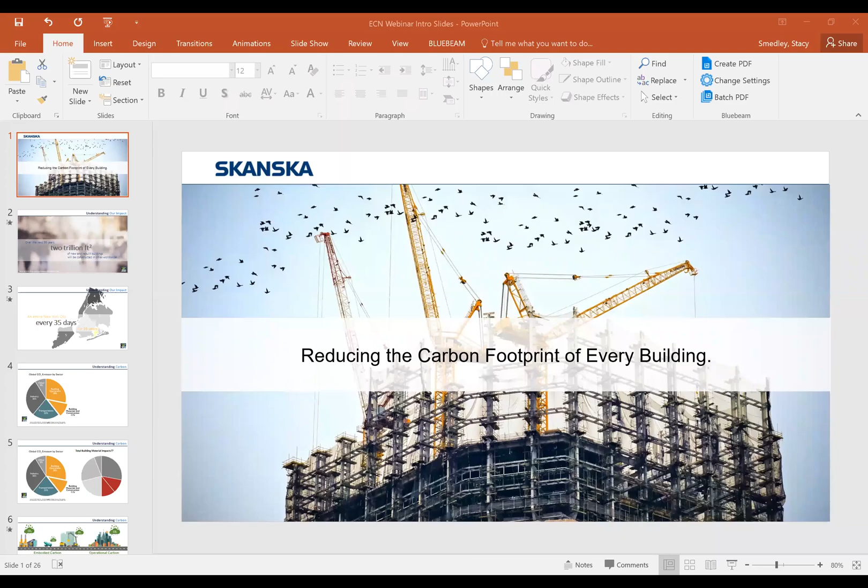Stacy has a Bachelor of Arts in Architecture from the University of Washington and 15 years in the architecture and construction professions. Her resume includes the first LEED for Homes Platinum certified project in Washington State, as well as the first project in the world to be certified under Living Building version 2.0 standard. At Skanska, Stacy leads sustainable initiatives and opportunities and is considered a subject matter expert in LEED and Living Building Challenge certifications, with a passion for reducing materials toxicity and carbon emissions associated with construction.

Stacy is committed to educating and engaging the AEC community on sustainable design and construction, and has served in various advisory and leadership roles, including Chair of the Washington Businesses for Climate Action, Advisory Board Member of the University of Washington Carbon Leadership Forum, Construction Focus Group Chair for the Embodied Carbon Network, Advisory Group Member for AIA Materials Working Group, and Emerging Professional Regional Chair for USGBC. She is an experienced speaker and a 2012 Living Building Challenge hero.

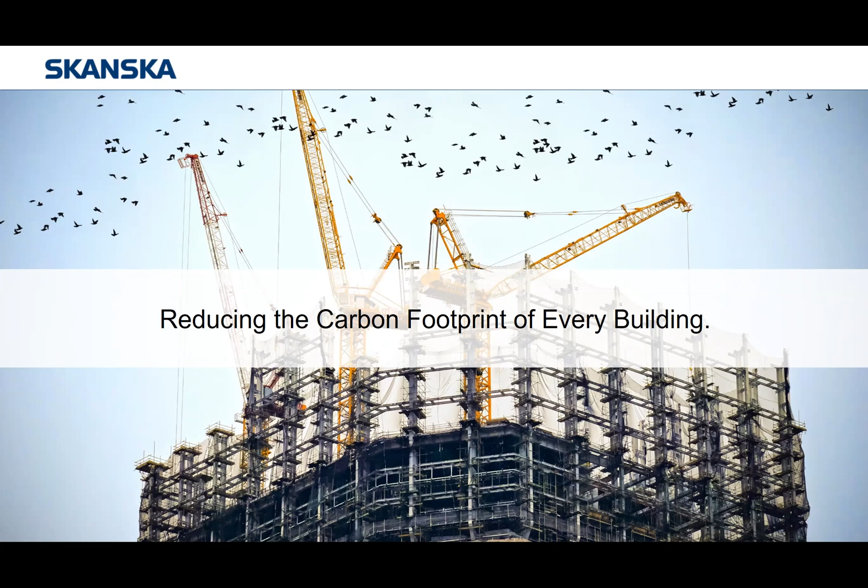There's a series of slides when it comes to embodied carbon that many of us have seen and could say in our sleep, but I always start with them because it's good to hear them over and over again so we don't forget. First is understanding our impact when it comes to construction over the next 35 years. These are slides from Architecture 2030 that tell us that, over the next 35 years, 2 trillion square feet of construction is being built worldwide. To put that into perspective, it's the equivalent of an entire New York City every 35 days for 35 years.

I always like to pause and just think about how many materials that equates to when you think about all the things building the...

Sorry for interrupting, Stacy. I don't know if it's just me, but you're cutting off a little bit. Okay, I will just talk a little slower and see if that helps. Yeah, it was the reception, I think. Now sounds good. Thank you. Okay.

If we visualize an entire New York City and think about all of the materials that have to be manufactured to build that amount of buildings, how those materials have to be transported all over the world to be put in place, and then the equipment we use to actually install those materials on a construction site, it's a daunting amount of emissions associated with all of that work. We need to be understanding those emissions and actively reducing them because we don't have time to wait.

We've all seen these slides, but I always like to talk through them also. The fact is that buildings equate to about 40% of carbon emissions globally, and we've been under the impression that building materials and construction, the embodied carbon component, are around 11%. As we continue to dig into construction-related carbon emissions, we have found overlaps with the transportation and industry categories, meaning this materials and construction component could actually be a lot more than that.

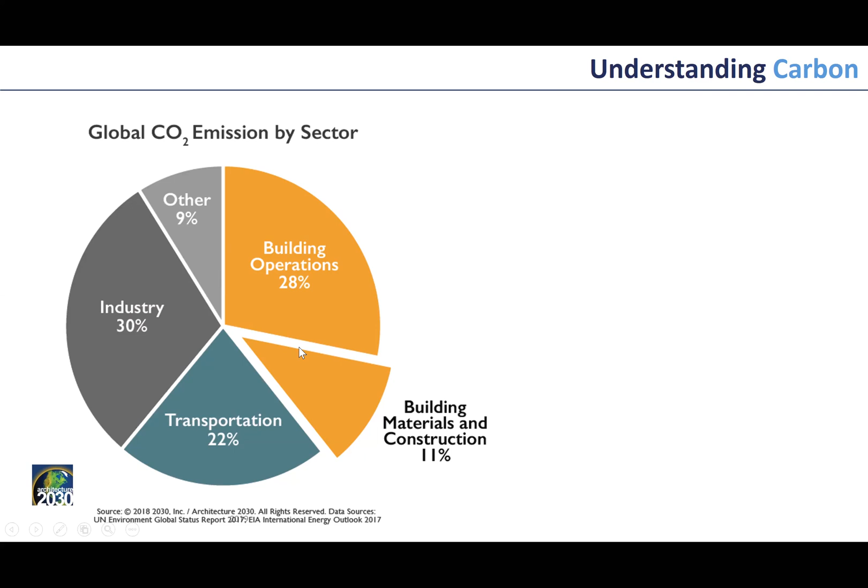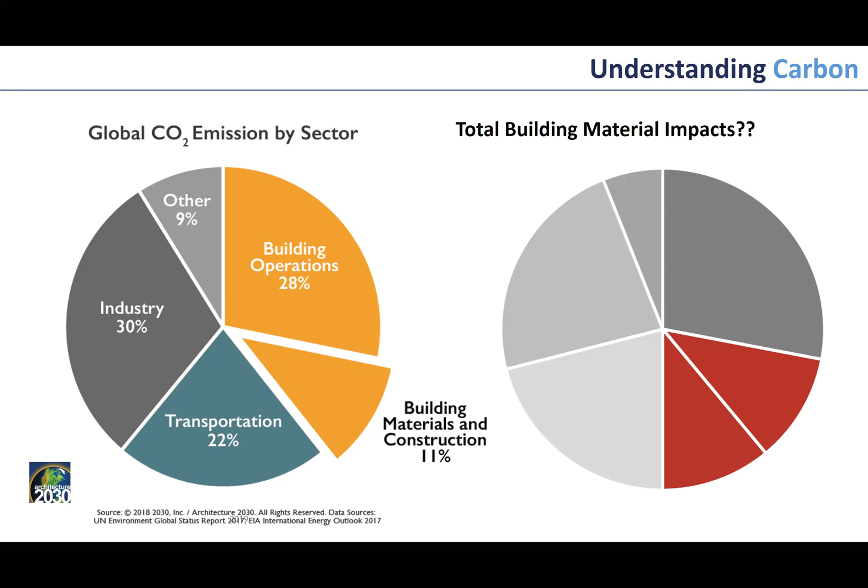What we're finding by digging into this more is that this 11% we thought was associated with materials and construction emissions is likely more than that, because it bleeds over into transportation and industry. So we're still quantifying this, and that's part of what we're doing now at Skanska—understanding this better and beginning to accurately account for these emissions in our jobs. So this is my little cartoon graphic when I'm trying to explain embodied carbon to folks.

First, I think we're all well versed in what operational carbon is—the emissions associated with building energy consumption. That's really after a building is constructed and you turn on the light switch, the mechanical systems start to work, and all those things. We've been looking at that for almost 30, 40 years now, and we've become pretty well versed on how to make buildings more efficient and build them with efficient systems for our clients.

This embodied carbon component has really only been on people's radar screens, I think in general, for about the past 10 years, with early adopters trying to figure this out. And really in the past 2 to 3 years, companies have started to understand what this bucket of carbon is and are working to benchmark and reduce it.

So embodied carbon really is the carbon emissions associated with the extraction, the manufacture, the transportation, the installation, the use, and the deconstruction waste stream of materials.

So when you're a contractor and you see images of all those things, those are really all the things that contractors touch when it comes to procuring materials from manufacturers, transporting those materials to site, and installing them. And then for jobs we're starting, potentially tearing down a building and getting rid of those materials—hopefully recycling them into new things.

So when Skanska started looking at this, we realized these were all things we could potentially inform our clients about and influence from a procurement and installation perspective.

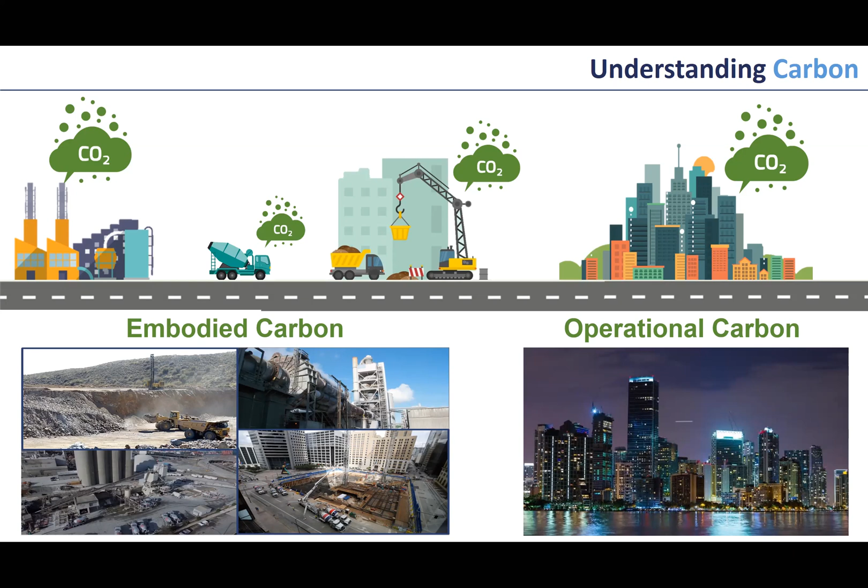This is a slide from the World Green Building Council's report on embodied carbon, bringing embodied carbon up front. This gets into the nuances of the stages of embodied carbon and how they're broken down and defined. What you're seeing here first is upfront carbon—that's really where all of the embodied material carbon and construction carbon we're talking about today lives, in this stage A.

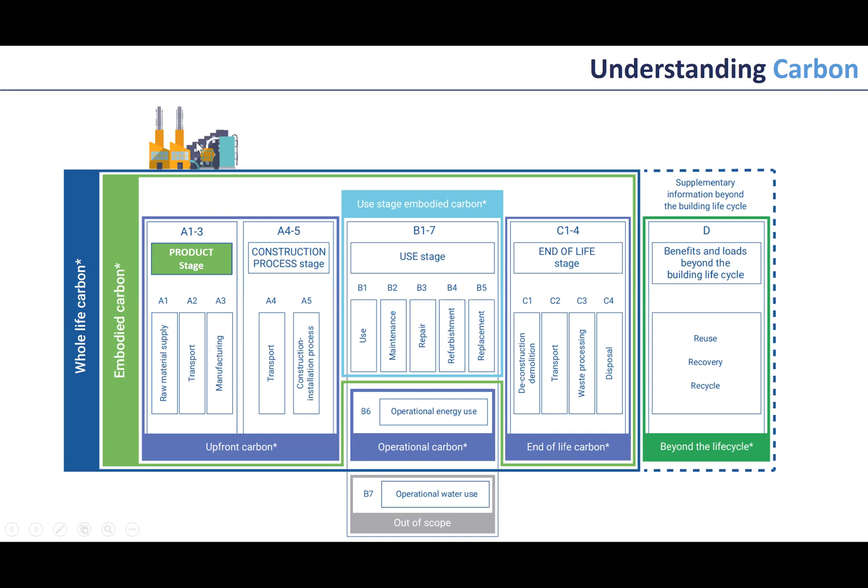There's the product stage, which is really the manufacture of the material—cradle to gate manufacture. There's the construction process stage, which is transporting that material from the manufacturer to the construction site and installing those materials to make a building.

There's then the use stage, which is really about materials and replacement. So if you have carpet tiles and you install them, you have the emissions associated with that first installation. But if you replace them in 10 years and then 30 years, there's the emissions associated with that replacement. So it's not just a one-time emissions purchase at the beginning of the job—there's ongoing additional emissions associated with those material replacements.

And then stage C is the end of life stage, and that really gets into how we deconstruct and demolish buildings with equipment—whether we're doing it with wrecking balls, like in the little cartoon, or doing it responsibly, where we can reuse materials in their whole form, like a structural beam or a wood beam. If we're not doing that, how do we source-separate and transport materials like demolished gypsum board, so it can actually be put back into the gypsum stream and replace raw materials. So that's really the end of life stage.

And for Skanska, this is really how we look at the buildings we're demolishing at the beginning of a project, to ensure that we're ending that cycle for a building that was constructed 50 years ago.

Beyond that, there are supplementary stages that are kind of beyond the life cycle, as well as things like operational water use, which are really outside the scope of embodied carbon. But that's really the whole picture. The focus of our talk today is stage A, and that's really the crux of the impact from a pie perspective. It can be upwards of 80% of that whole pie, so it really is a place to start.

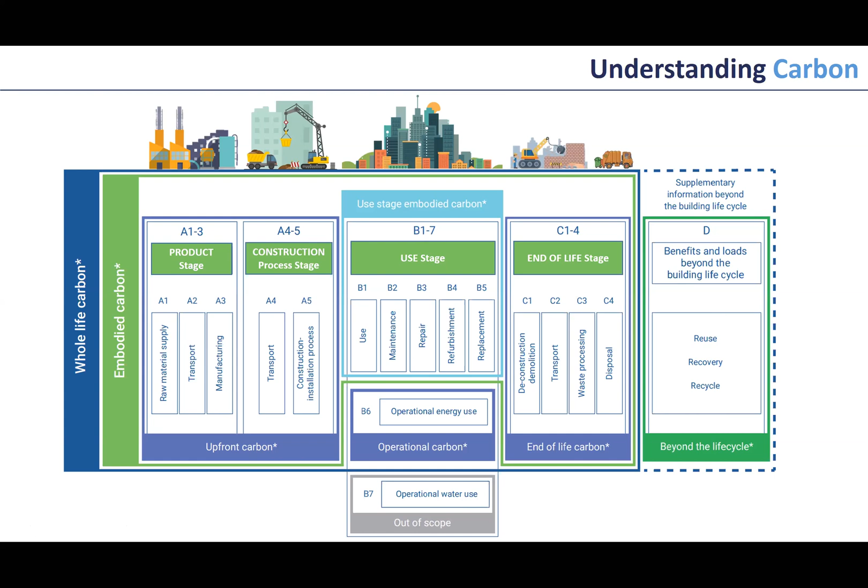Based on research that we've done and folks like Architecture 2030 have completed, we understand that this embodied carbon impact is at least 50% of the global carbon footprint of buildings to 2050. So taking the time value of carbon, which is really zero carbon by 2050, half of our impacts are in this embodied carbon bucket.

We know how to reduce operational carbon to zero through efficient design and renewable energy. We are still figuring out how to quantify embodied carbon and then begin to reduce it. And we need to do this as quickly as possible. We can't take 30 years to do it like we did on the operational side. So how do we do that?

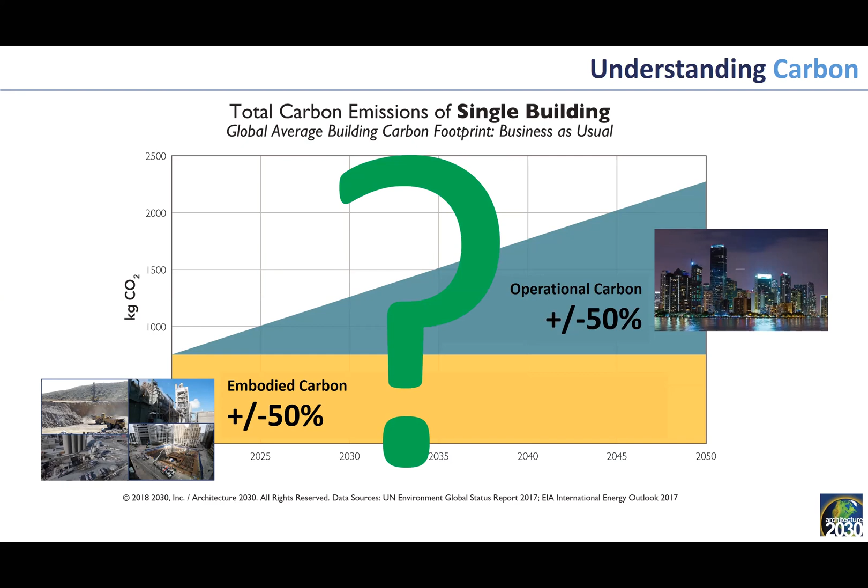Well, the first thing that Skanska did, and I'm going to go through this quickly, but it is important, we have to be able to talk to our clients and understand what the potential impacts are. To do this, a group of us, including Oregon DEQ and the Pankow Foundation and Skanska, funded a research grant that allowed the Carbon Leadership Forum to create a benchmarking database.

You can go to this website at the bottom of the screen, and there's a database of buildings that have done carbon footprint accounting. You can search by type of building and scope of materials. It gives you a box plot that shows, for X number of commercial buildings, some had a kilogram of CO2 all the way up at 995 per square meter, one all the way down at 10. But the crux of the buildings are in this gray area from the 80th percentile down to the 20th.

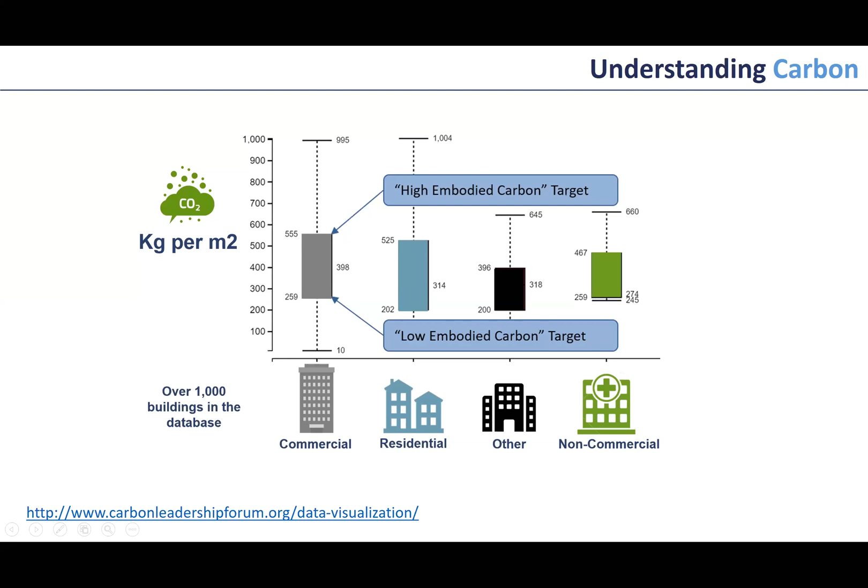So if you take that 555 kilograms of CO2 per square meter number, multiply it by your square meter, you can also do that in square foot, and look at the energy grid and your operational footprint, you're able to take that data and forecast what your embodied carbon footprint and operational carbon footprint might be. This is looking at a project in Seattle where we've done this.

We try to show this to all of our clients during the interview process or early in design so they can understand the relative impacts of their carbon emissions. For a Seattle project, it is largely embodied carbon because our grid is almost entirely hydroelectricity and our code is very efficient when it comes to the required EUI baseline. So if we're talking to a client in Seattle and show them this pie, and they've had a carbon goal on the operational side, this really starts to open their eyes to the fact that there's this whole other bucket of carbon that's actually more of their impact.

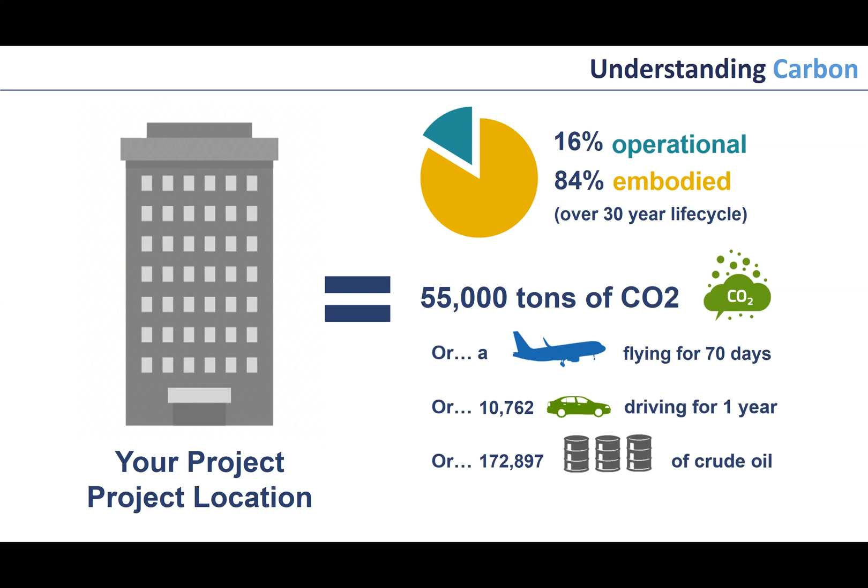We did show this slide to the Microsoft campus when we interviewed for the job, and they have lofty carbon reduction goals on the operational side to get to zero carbon. Because of being able to understand that they had this impact on the embodied carbon side of the equation, they have committed to embodied carbon reductions for their campus modernization project, and they're also going after zero carbon certification through the Living Future Institute.

So I think there is a responsibility from the contractors as we are working with clients and understanding this embodied carbon component more, to really share that information and help inform our clients that there are opportunities for reduction and there is a big impact to tackle.

The next thing that we did was really try to figure out how contractors could interface in the design phase to help influence material choices to reduce carbon per material category. I'm not going to go into the details of all this, but briefly, there are life cycle tools that our design partners use early in design to look at embodied carbon impacts along with other environmental impacts to make really smart system choices.

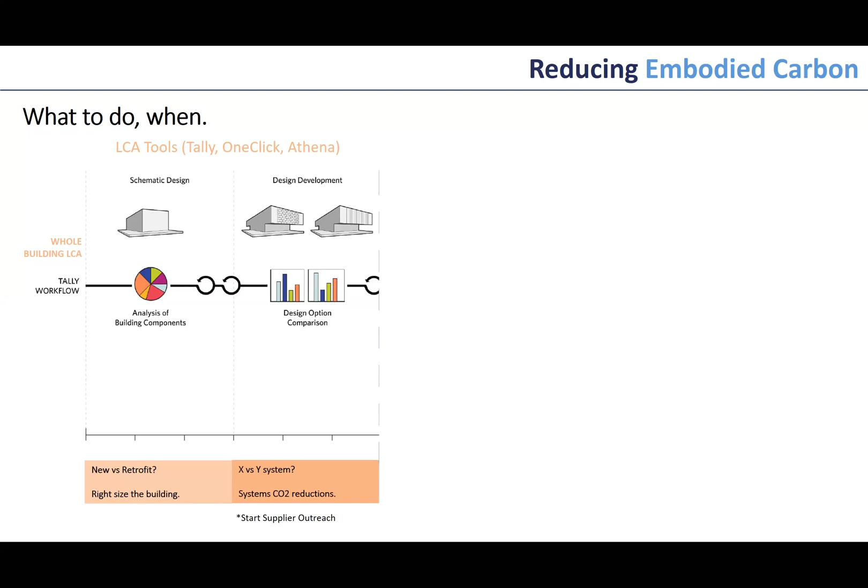But what we couldn't find was a tool that would allow design teams and contractors to begin to specify and procure based on carbon emissions of materials. So how can you look at manufacturers and actually make choices based on emissions? Really, both of these things need to happen. You have to have early design decisions happening based on carbon emissions, and you need to specify and procure based on carbon to some extent. Only then can you really reduce embodied carbon and have it realized.

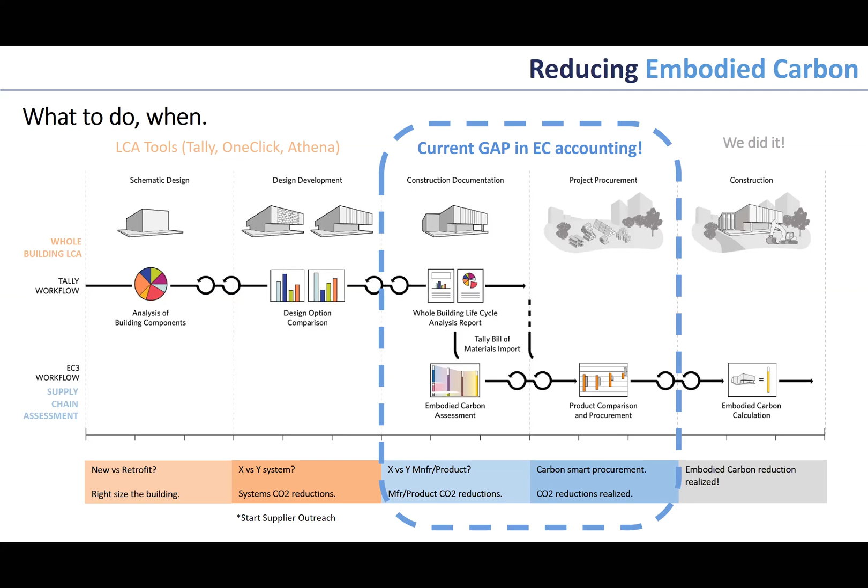Skanska, with the Carbon Leadership Forum and Microsoft, developed a free open source tool looking at supply chain accountability when it comes to carbon. I'm not going to go into the details of EC3 specifically, just an overview since this isn't an EC3 webinar.

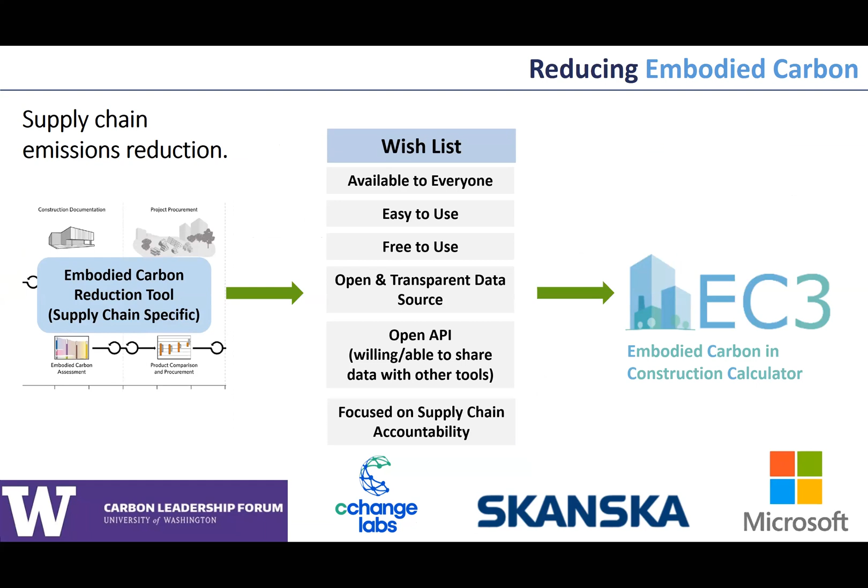It's available to not only contractors, but anyone, to log in for free and look at carbon emissions of materials. It's supported by a lot of folks in industry. From a contractor perspective, a lot of our core clients and partners are looking at this and wanting to fund and understand embodied carbon of materials, and really work together to reduce it. So it's something that's going to be coming more and more from our clients on our jobs.

To do embodied carbon accounting at the material level, it's really similar to cost estimating, where we have material quantities from an estimate and then a cost per unit. In the case of carbon, we have material quantities from an estimate and a kilogram of CO2 per unit that can then give us a building embodied carbon estimate.

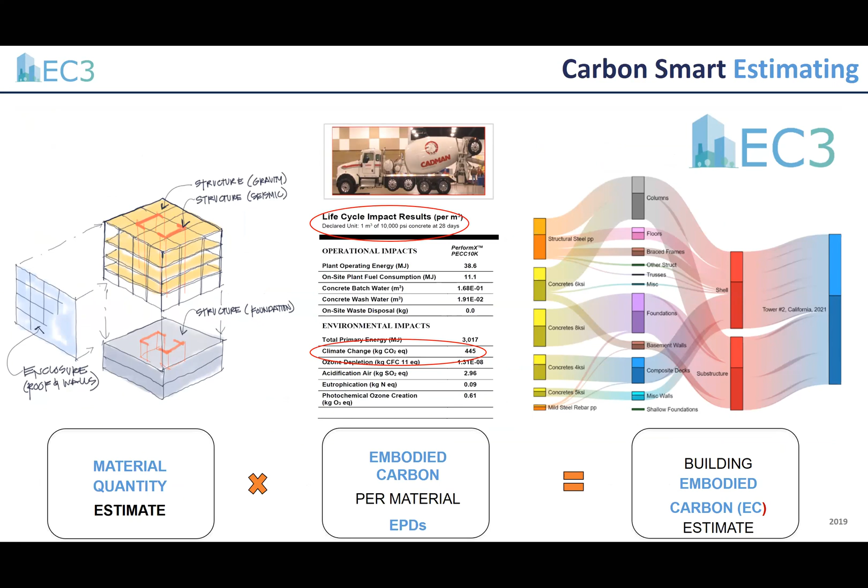The EC3 tool, just to show adoption and why there's a business case for this on the contracting side—it's a tool that's got over 3,000 users as of this month, being used largely by architecture firms, sustainability consultants, and contractors. So there's this impact we need to account for, and there's also the responsibility to be smart on this when it comes to our clients and owners.

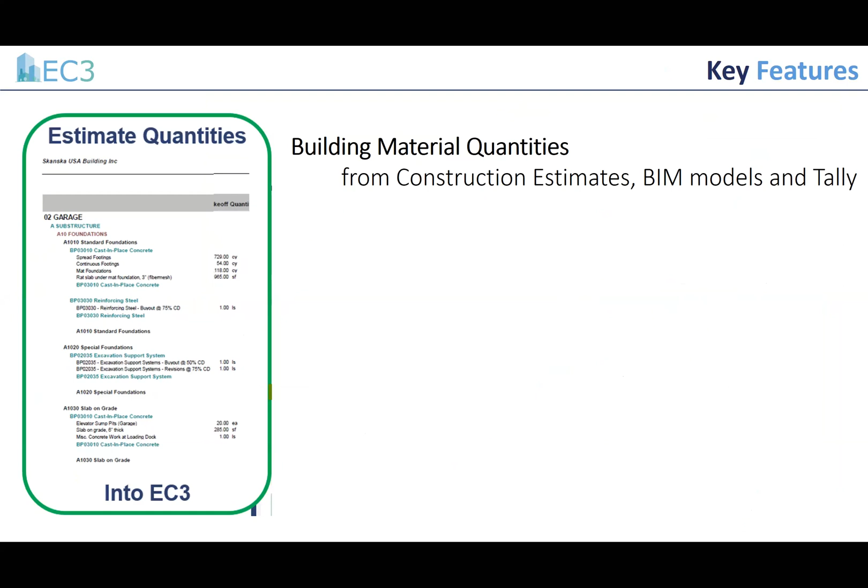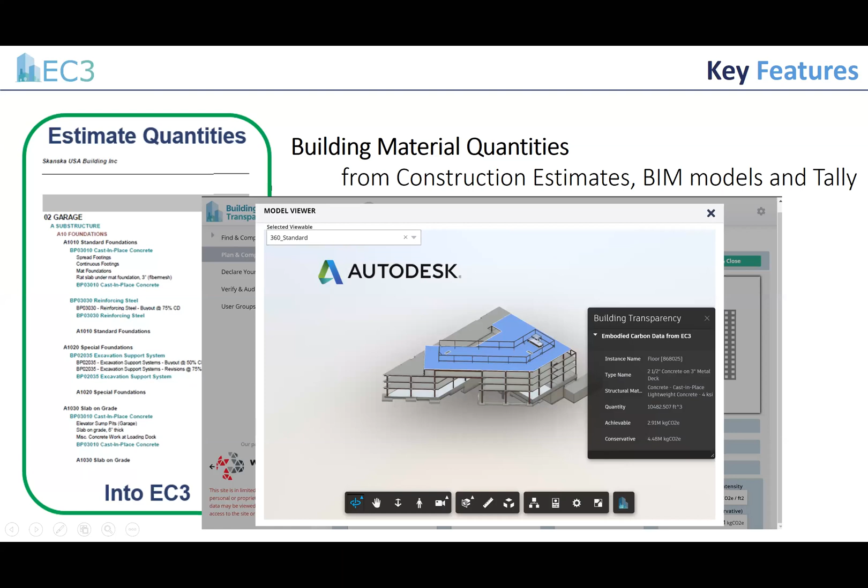Material quantities for contractors typically come from estimates, so there's a way to input information and multiply it by carbon emissions in EC3. There's also a way to import BIM models to get quantities, and a way for our design team members to export their LCA models from software called Tally.

Environmental product declarations are really key to this whole process. They're like nutrition labels for products, where we have a serving size or a declared unit, and a kilogram of CO2 or a total carbohydrate. This is really where we can get into the supply chain accountability—where we can look for manufacturer-specific EPDs, ask our manufacturers to make these things, and start to compare manufacturers based on carbon and cost.

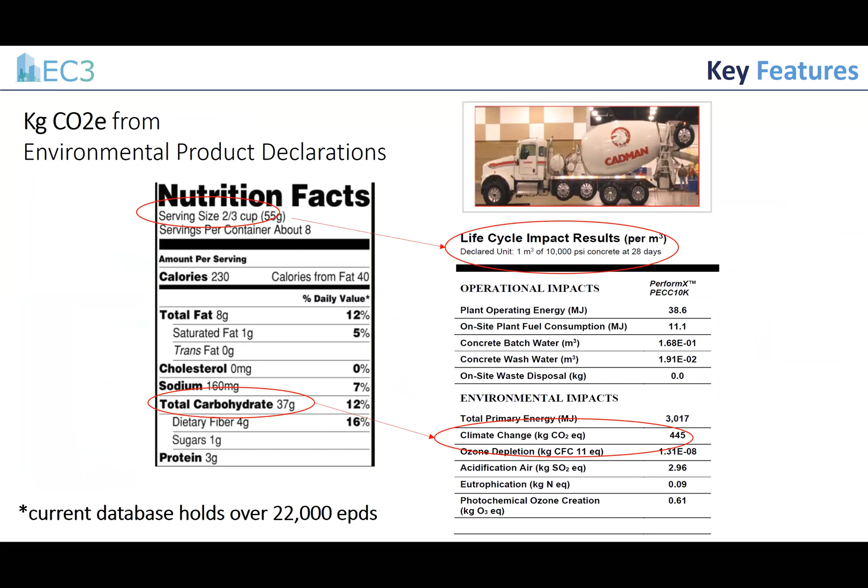The EC3 tool currently has over 22,000 EPDs. A lot of those are concrete, because concrete EPDs are mix specific.

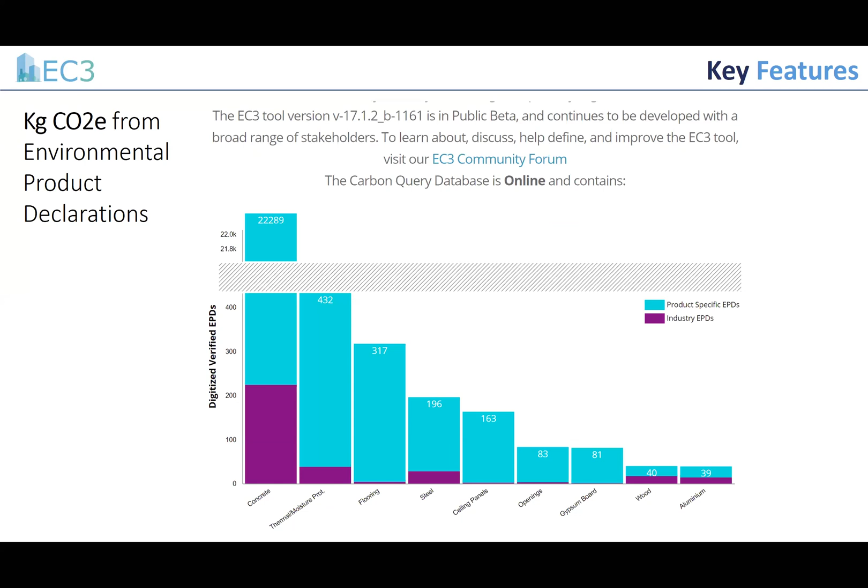The whole idea here is on the embodied carbon stage A1 through A3, which is really the manufacturing carbon—you can use EC3 to go in and assess the market for EPDs. You can start to compare suppliers and manufacturers based on their carbon and their EPD disclosure.

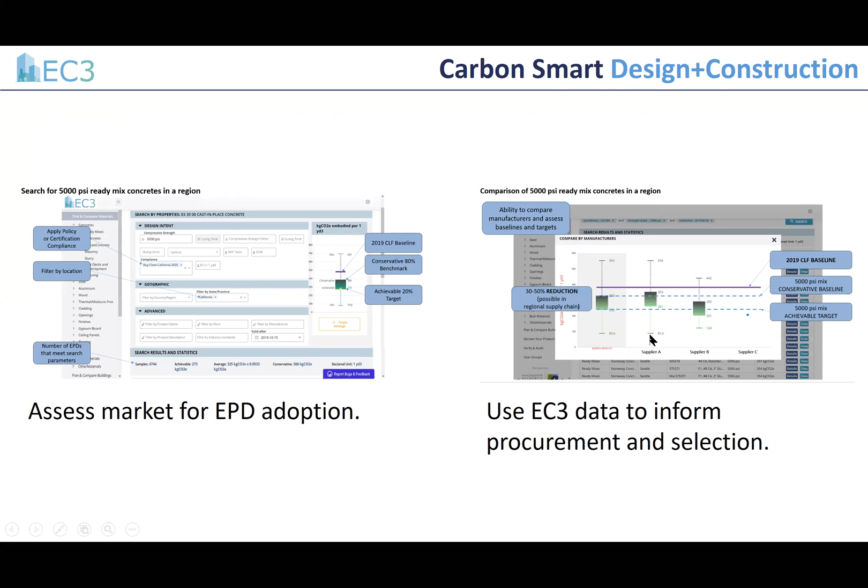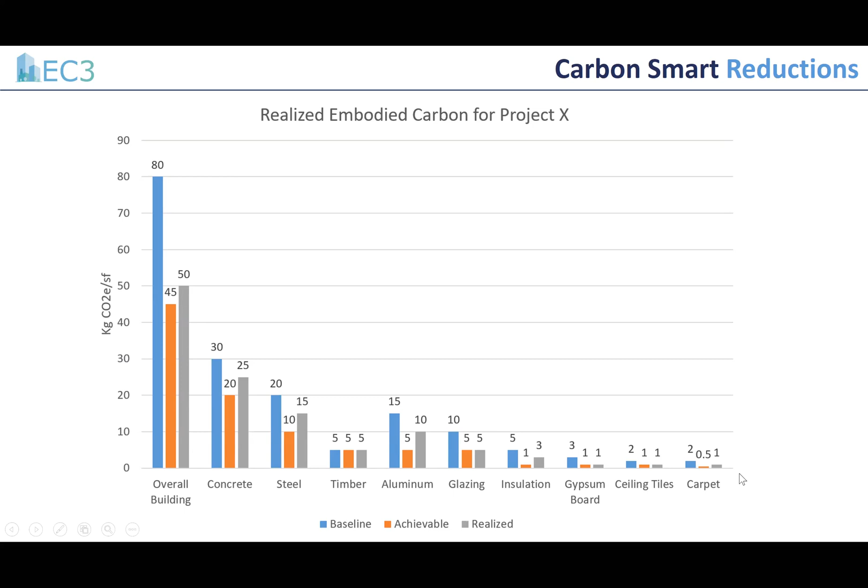At the end of the day, you could do something like this, which is currently being built out in EC3, to show overall building reductions based on the supply chain—what was possible, what you achieved based on environmental product declarations for products—and that can be broken down per material category to really understand where reductions are happening and what's been realized.

At the end of the day, the whole point is to reduce supply chain emissions, and have our role as contractors inform that through working with our suppliers, asking for disclosure on carbon, and helping our owners specify and procure with carbon emissions in mind, just like cost. If we do that, all of the emissions for these materials go down, because suppliers understand they are being assessed on this and actually need to reduce their emissions to compete.

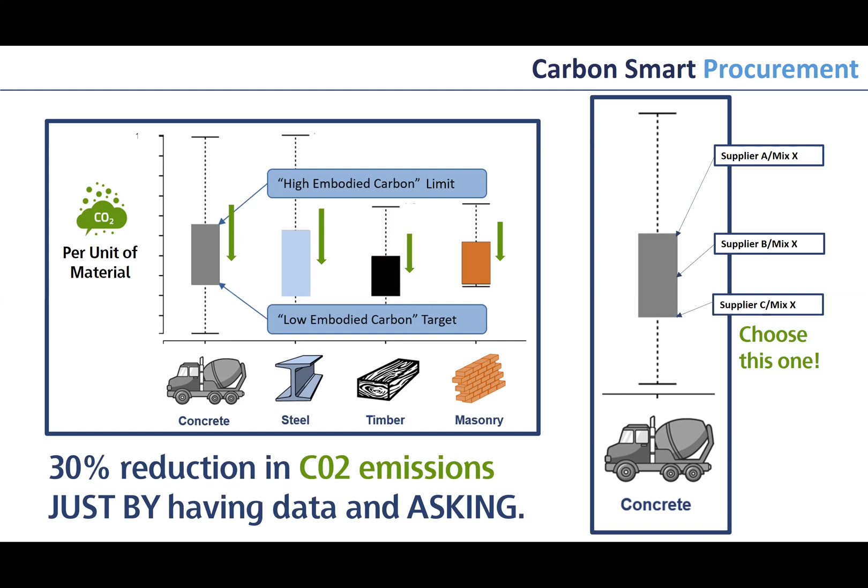And just one little note on the stuff that Mark's going to talk about on the construction site side: there's still a lot of work that needs to happen when it comes to how we account for emissions once products leave their manufacturing facility and get to site. There's a lot of research happening around this, and you'll see how Skanska is approaching tracking it. But really, innovation needs to happen on the construction site side, and we need to be pushing our equipment partners to think about electrifying things and reducing emissions.

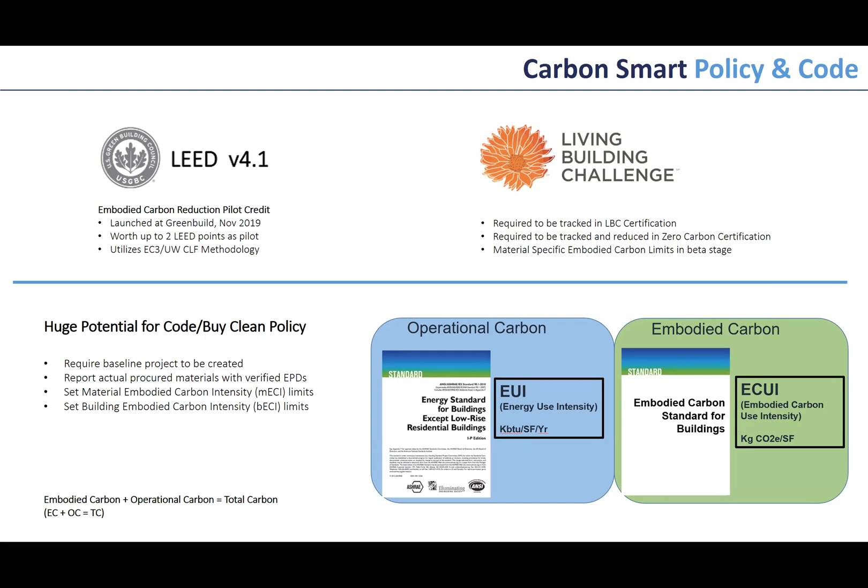The last thing is the fact that there's policy about this. It's not just certain construction companies doing this because we see the potential need for reductions from a climate perspective. There are also clients looking at this from a LEED certification perspective, where there are points for embodied carbon reductions. There's a living building challenge now with zero carbon certification, and clients like Microsoft and Amazon committing to those programs. There's also policy work happening that's looking at embodied carbon just like we look at energy use.

And with that, I'm going to hand it over to Jenelle to really dig into how Webcor has been looking at this from a contractor perspective.

So no pun intended, but this picture responds to this saying: laying the groundwork. I want to start by identifying where we started and where we are today. As Stacy mentioned, the impact of emissions we influence at the time of material procurement are Scope 3 emissions. This includes things like purchased goods and services and materials. These are all upstream cradle-to-gate items, and those are the things I'm going to talk about today. So in order to track this data, I want to walk through our process from inception and where we are.

So Webcor got involved with EC3 and the Carbon Leadership Forum around April of last year, so it's nearly been 12 months. We were asked to support the development of the tool from another GC's perspective. Skanska had been a partner and initiator of the tool from inception, and we wanted to come in as a collaborator, not a competitor, acting as the other GC perspective since our estimating efforts and costs are a little different. So we were able to bring a different lens to the development of the software tool. Between April and November, when the launch began, we dove into the work with the IT team and developers on what we could improve.

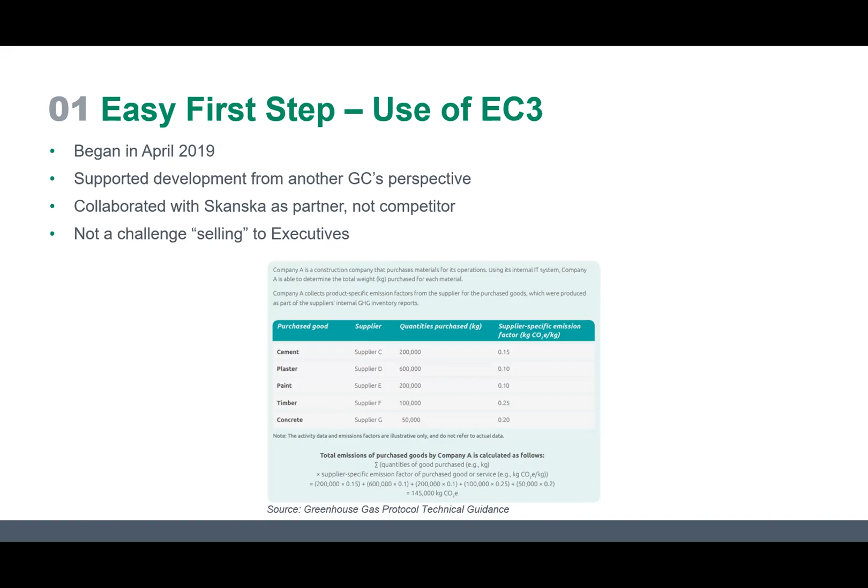Once we mastered the tool - and I don't mean mastering EC3 in absolute terms, there's always things to learn, always new changes daily - we decided we wanted to take it to the next level. There was much more insight EC3 allowed us to gain. So how could we go beyond just data entry and reporting? We started asking internally what new norms we could directly influence as a general contractor, what local jurisdictions were doing that we could build upon - doing business in California is fantastic given how stringent local codes are compared to other states - and how we could push that further. We also asked what needed more focus within our industry. We felt general contractors were typically left out of embodied carbon conversations, and we wanted to embed ourselves more systematically into this process.

So what we ended up coming up with was our carbon commitment, with four items I want to go through. The first part of our commitment is to employ EC3 in all new projects, ultimately with the goal of comparing and reducing embodied carbon emissions from construction materials by making informed material selections. We wanted to make sure we could utilize and continue supporting the tool that we spent months helping develop.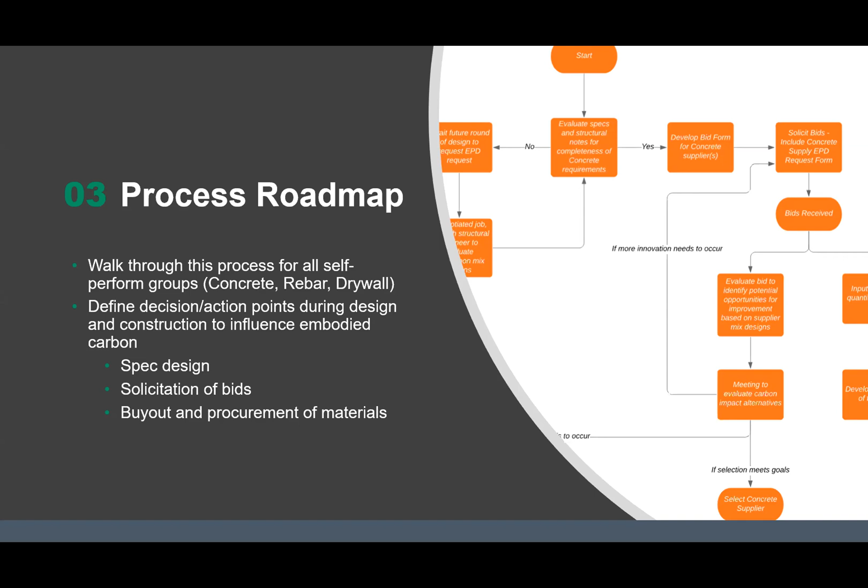Another element within the workflow that needed to be changed was our bid buyout process. So we developed these EPD request forms for the following materials: carpet and ceiling tile, concrete, rebar, drywall, framing insulation, enclosure and glazing, structural steel, metal stairs, and timber. For all those material types, we developed a form very similar to this, an EPD request form.

There's two components of this form that we wanted to address. The first being that we wanted these forms to teach the bidding subs the value and importance of embodied carbon, and really prioritize it as part of our evaluation process with the bids. This ultimately gave more transparency to those who didn't know what the three-letter acronym EPD meant before this point.

I'm sure many of you on this call realize that maybe today's your first time learning about an EPD, maybe you've heard it a million times, but a lot of people that we work with on a day-to-day basis don't know what that means. It's new to them, so we need to start teaching and educating them. We felt like this was a valuable opportunity to do so.

The second component was really to be sure that we collected accurate data that could be easily transcribed into EC3 for final evaluation. If you have inputted quantities into the tool, you're familiar that sometimes collecting this information can be more difficult than it really should be.

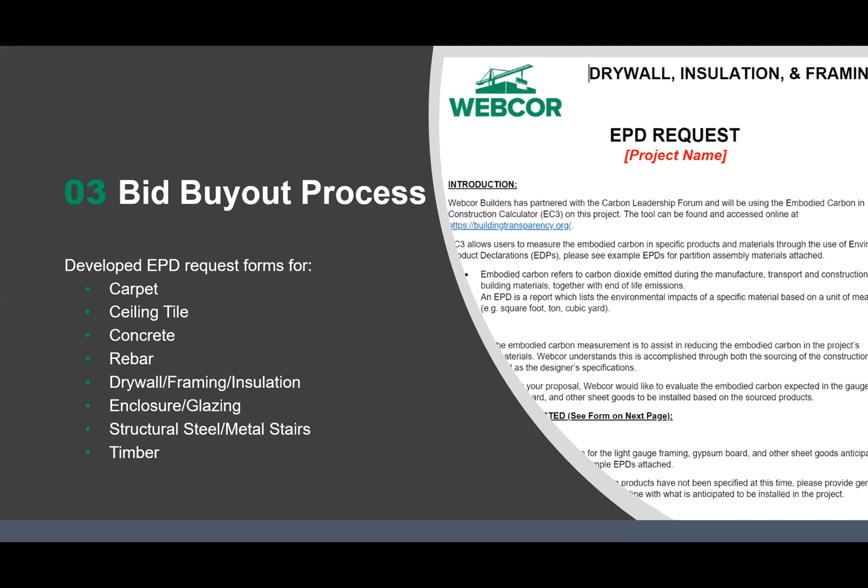It's really important to just find the info from the right resource, and that typically is the challenge. So these forms help us collect the data at point of source, and the transfer of knowledge and data into the tool is much more streamlined in that manner.

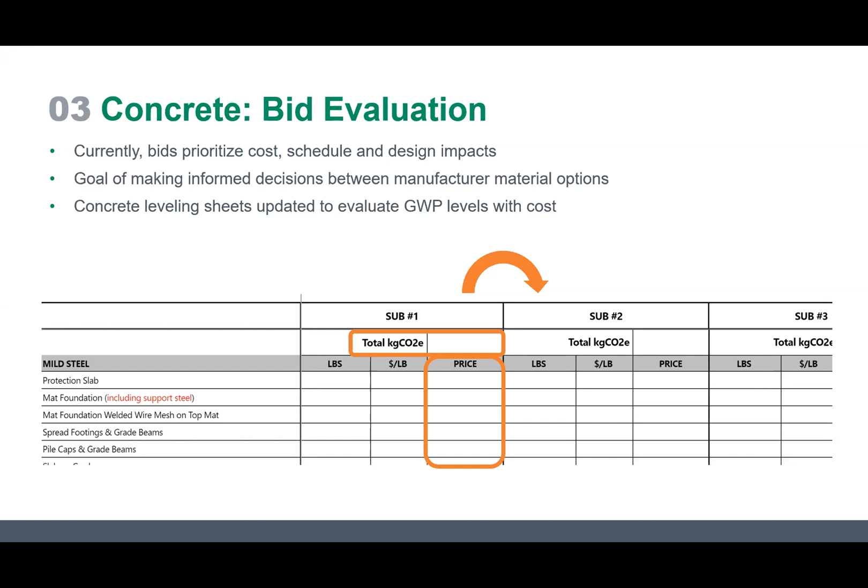The third piece of the current concrete workflow that needed to be changed was the bid evaluation process. Currently, our concrete bids from suppliers are prioritized based on cost, schedule, and design—that's typical in construction. But to make informed decisions and meet our carbon commitment, we needed total GWP information as a factor. So we added total kilogram CO2 equivalents as a data point to collect from each sub and compared that against cost. We updated these leveling sheets to ensure GWP levels were compared sub to sub. Now it's become an evaluation tool and metric for our self-performed concrete teams when reviewing bids, making them more educated about this language and process.

The last part is the drywall group. Our self-performed concrete and drywall team members were key in making this successful, so our workflow for drywall also needed to be changed. But what we discovered through this evaluation and further talks with our team was that it's more difficult to integrate EPDs into their buyout process compared to concrete, mainly because they don't buy out their own materials—they use purchasers, and these individuals are the ones who actually make the decisions. Our team members don't make those decisions, so we had an additional step in the process we needed to figure out.

So we determined as a team that we needed to start influencing certain product manufacturers based on our consumption of that material type. Identifying what products or manufacturers still align with our carbon commitment, yet would not jeopardize traditional design and construction means and methods, was really important. So we started talking and educating manufacturers on things that could help support our use of their products during construction, and ultimately our priorities were the lowest GWP values.

But what we ended up finding out was there's a popular product, USG EcoSmart, and in talking to our team and service providers, this actually was not a favorable product for our laborers. It may be spec'd because the architecture community likes it—it has high recycled content and low GWP—but ultimately this wallboard tends to crumble when cut, in a lot of cases due to the high recycled content, resulting in a lack of productivity and lost material and waste.

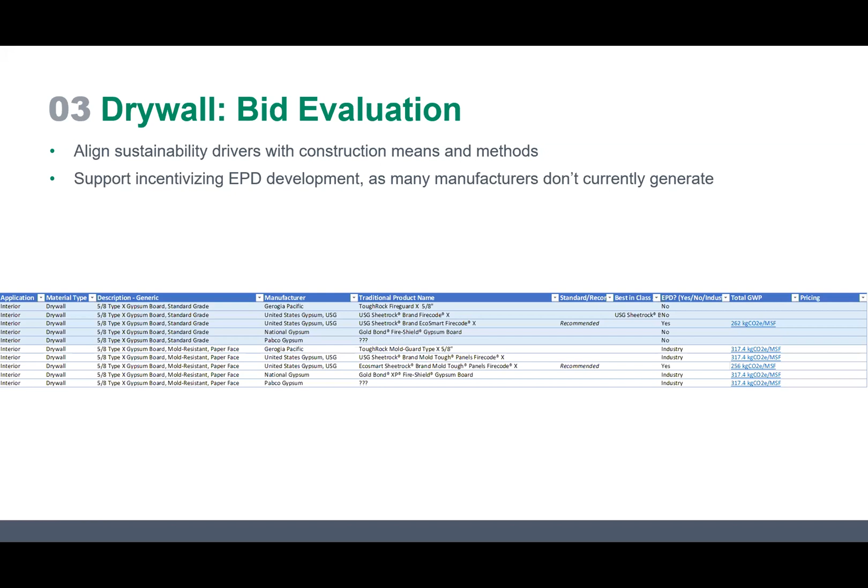Another piece of this, which Stacy touched on a bit, was that we found drywall manufacturers don't actually produce that many EPDs right now. Concrete is the highest performing EPD-producing industry. Drywall is a very, very small percentage of the total EPDs out there. So we're working with these manufacturers, starting to request more frequent production of these EPDs, and hope to change the trend in the future. More to come on that.

Now I want to go into two different unique case studies where we began to implement these items we just discussed, showing how we've been applying this new knowledge and process in our new business operations. The first project here is

960 West 7th Street in Los Angeles—a 56-story, almost 1.4 million square foot mixed-use apartment tower. This project prioritized early coordination with the ready mix supplier, National, as well as the structural engineer team, MKA, and ourselves as GC with our self-perform group, Webcor Concrete. The team's goal early on, and the need for the design, was to increase compressive strength. But to do this most effectively, they evaluated two different mix design options—the first option was a weaker option.

So it was utilizing a local aggregate, and for whatever reason, this aggregate in the local LA market is weaker, and ultimately would require more cement to be added. And as we know, cement has a higher GWP, increasing the total embodied carbon.

So our team needed to coordinate with the suppliers to see what strength opportunities or properties we had to meet based on the design, what we could meet with the local aggregates, and then assess the cost-benefit analysis as to the benefits and cost impact, and how this would align with our structural design.

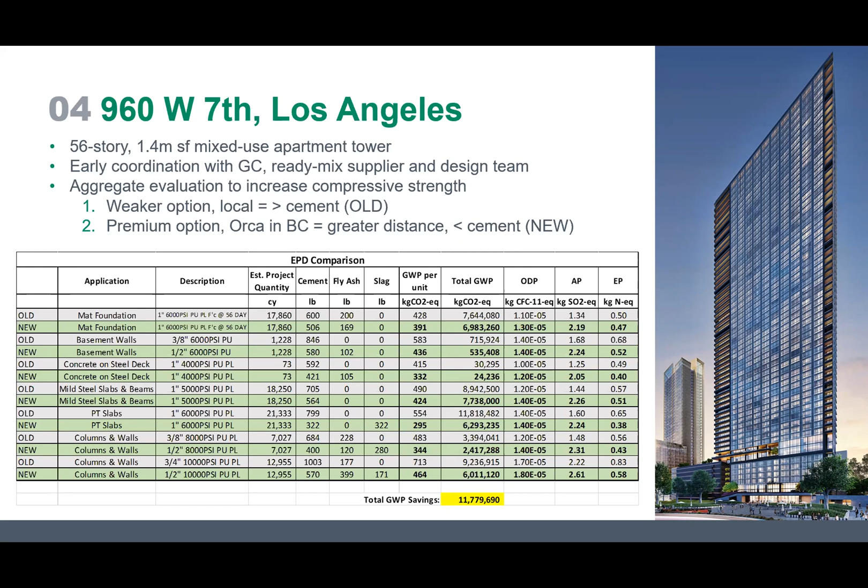And in talking with our Webcor Concrete team, a couple of challenges that I found were cost drivers and decisions due to competition - that was just huge. So cost is always key. The business and the marketplace is really challenging right now. And if there's always ways for us to find open and frequent dialogue and make these discussions a priority, it's really key to do early and often.

So we decided to also embed embodied carbon into the analysis with our estimating team. It wasn't something that they had prioritized as clients, but we wanted to make it part of their discovery. And ultimately, the alternative design option actually ended up saving about almost 13 million kilogram CO2 equivalents, but it wasn't an item that was deemed critical to the client.

And the reason why I'm telling you guys this story is because, as already mentioned, I think it's really important for us to be transparent and communicate the options that clients may have, even if they don't ask about it. And even if ultimately it's not a decision factor that the team decides to make an impact on. So this was not a driver for the client, but it was something that we felt was valuable to show them anyways.

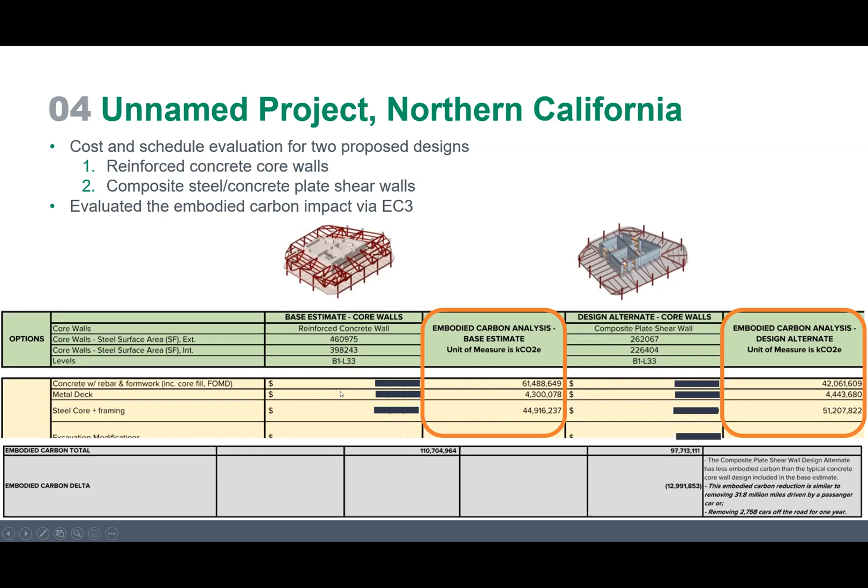And then I think finally, next steps for really all of us is to think about, in the AEC community, how can we improve this process moving forward - test it out on more projects, have a continuous innovation loop of redirecting and changing and editing the process as needed as the marketplace becomes more familiar, really begin to evaluate our Scope 3 emissions over time through our historic data collection, and finally collaborating with other AEC manufacturer leaders. It takes a village to make this happen, and the opportunities really are endless.

And I think I'm excited for everybody on this call to really hear what we have to say today, because I think it takes many people more than just the general contractors to make this successful, and I look forward to the future. So thank you guys very much, appreciate it.

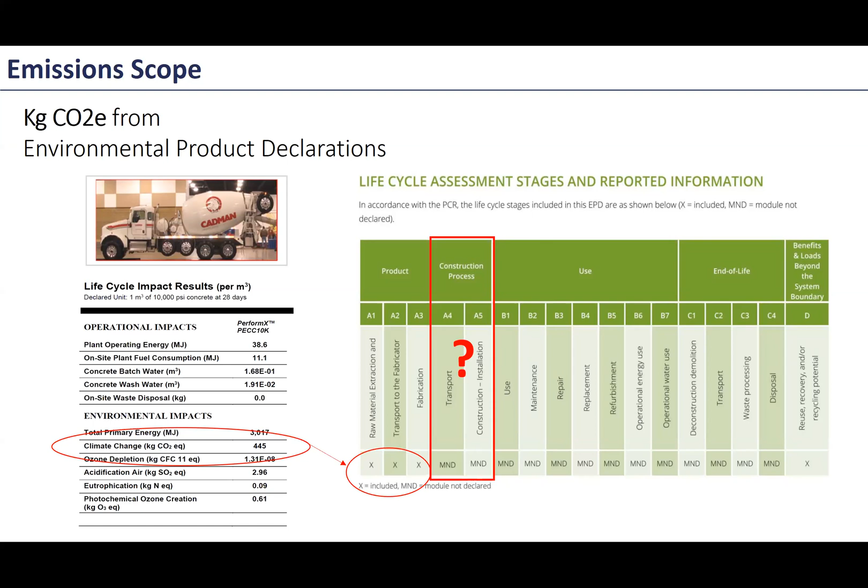Just to lay the groundwork, really boiled down to, for us, tracking 4 different things, and that was material transport to site, waste hauling from site, any off-road equipment and vehicles burning fuel within our project fencing, and then our temporary power usage.

So from that, knowing that we needed to get fuel burn in gallons or vehicle miles traveled and kilowatt hours, we asked ourselves and working with our project team, what are we tracking and what are our trade partners and subcontractors already tracking that we can piggyback off of to make this as time efficient and painless as possible. Because obviously, like we've talked about before, time and cost impacts are always at the forefront of a contractor's mind. And so we were kind of brainstorming how to streamline this whole process.

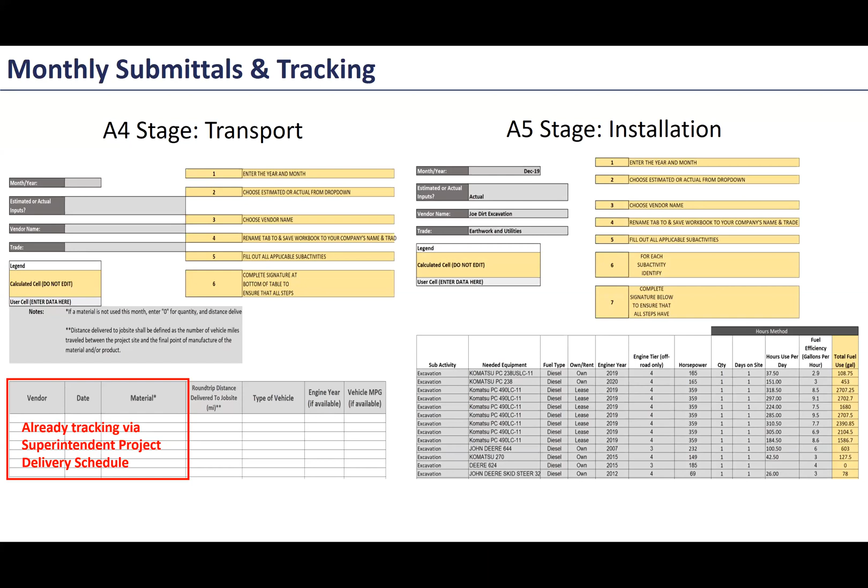And then for installation, that's mainly all of our off-road equipment fuel burn on our project site. It was the same exercise. We asked for a number of different things and data points from our subcontractors and trades. And what we found out is that a lot of this is already being tracked internally by those firms. Usually someone out there has an equipment log or at least a fuel log that gives us access to the data we need. Ultimately, one of our trades pushed back a little and said this is a little too much of a lift to fill out all this data.

So we just simply asked for the fuel invoices that they had been receiving on a monthly basis, which was a pretty simple exercise. And so it's the same concept for waste haul tracking. We get diversion reports on a monthly basis that give us access to where we're hauling all of our waste. And just knowing the vehicle mileage behind that is really all we needed to get a carbon footprint.

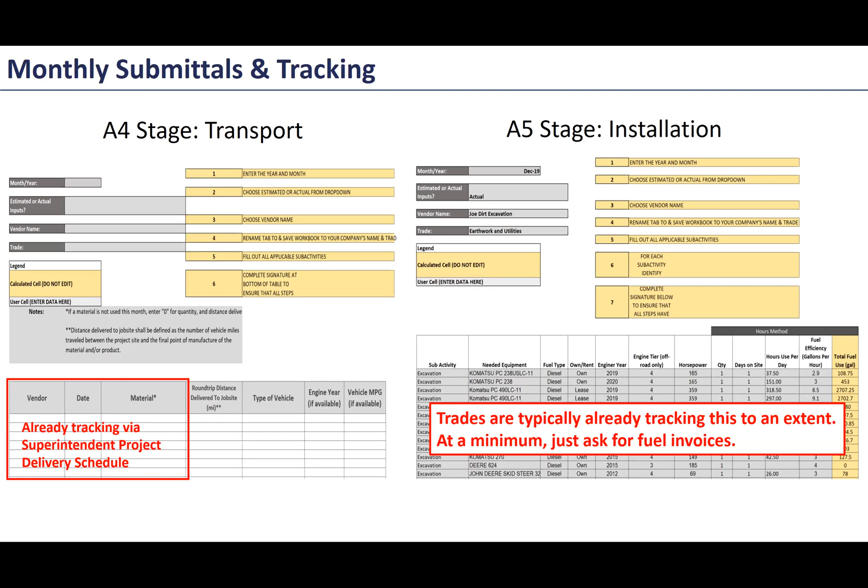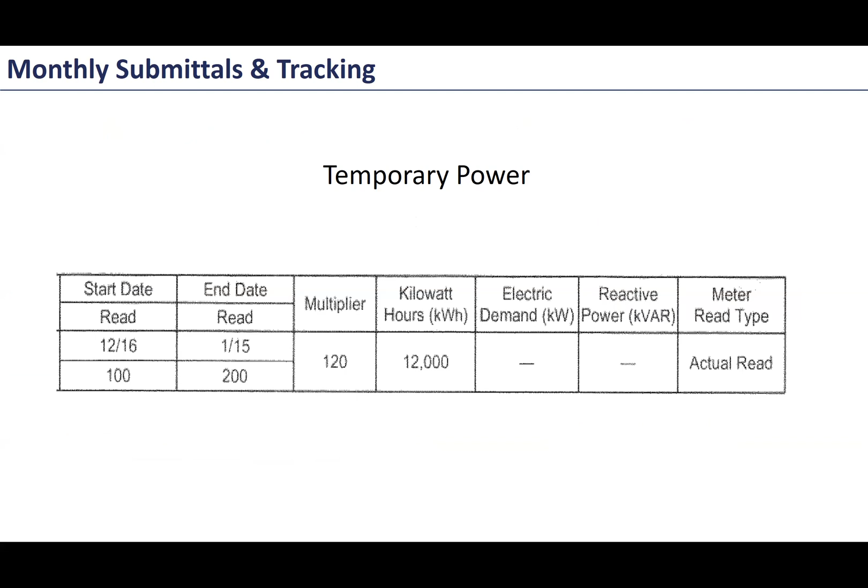Same concept for temporary power. I think it worked out well on this project that we, the general contractor, were paying for our temporary power usage. So this was as simple as me talking to our accounting team and having them show me how to actually go into the system and pull our monthly utility invoices that we're getting billed to the job site. Every utility invoice shows a kilowatt hour usage based on a meter reading for a given period of time.

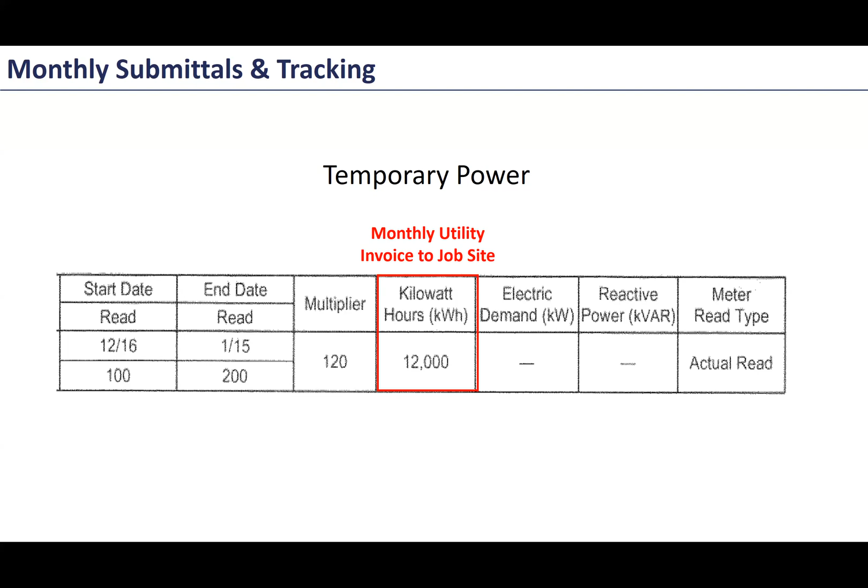And so with that and our utility emissions factor, it was a pretty simple calculation to do. Once we had all of that information, Microsoft Excel being the powerful tool that it is, we were able to automate a spreadsheet that basically spat out all of this information, and that allowed us to digest all of the data that we were getting.

So if we want the best bang for our buck, as far as trying to figure out ways to reduce that number, we're going to target our off-road equipment, maybe not so much on the side of temporary power. It also allows us to break it down by trade and source of where the carbon emissions on our site are coming from in proportion.

And then the other metrics we've been tracking, trying to normalize all this carbon data against some of our actual work in place, if you want to call it that. So for our demolition subcontractor, if we know that they're emitting a certain amount of carbon per month, and if we know that they've been demolishing a certain square footage of building, we can start to look at that as pounds of CO2 per square foot of structural demolition.

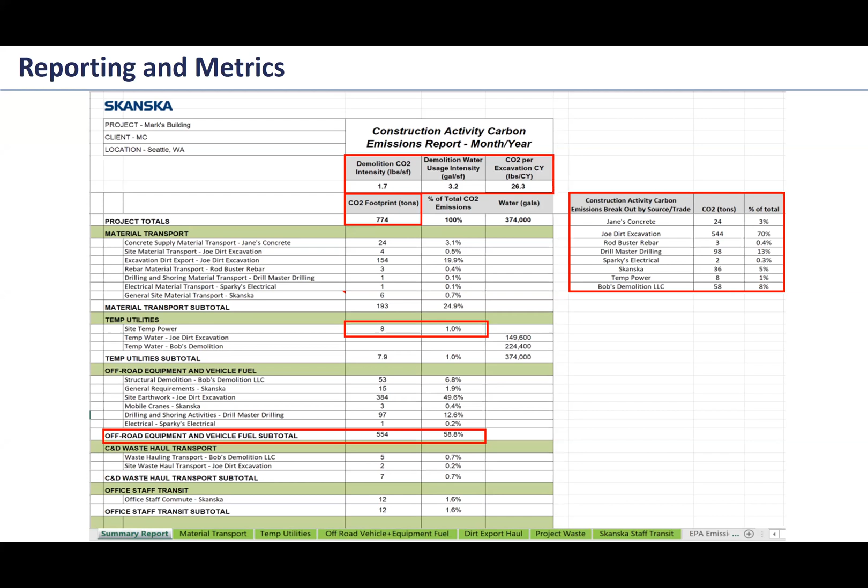So we've been looking at that metric for carbon emitted per cubic yard, or truck cubic yard, of excavation that we've been hauling off site. And the same thing actually for water usage too, which is a whole other conversation, but has been a really interesting data point to track. And so this ultimately rolls up into a project total spreadsheet, and that's kind of how we've been tallying our numbers and accounting for our carbon on site.

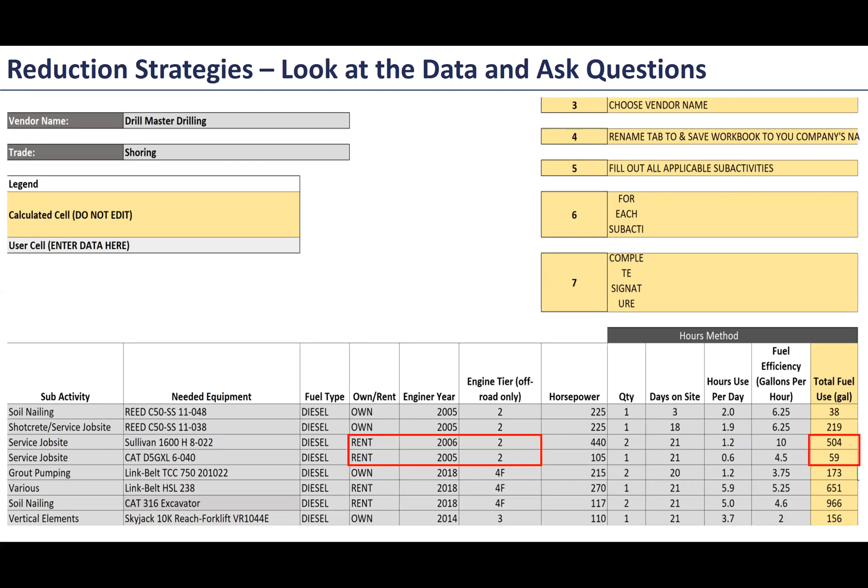There's other reduction strategies we've looked at around reducing fuel burn. Stacy was more involved with this a while back. On one of our projects, we had reinforced concrete buildings being demolished, and instead of trucking that concrete offsite to be crushed into base course and trucked elsewhere for road base, we worked with our demolition subcontractor to get a concrete crusher on site and used the crushed concrete for applications on site as road base for our construction haul roads. Stacy did a lot of calculations on the carbon savings associated with that, and it was a big win for us on the reduction side.

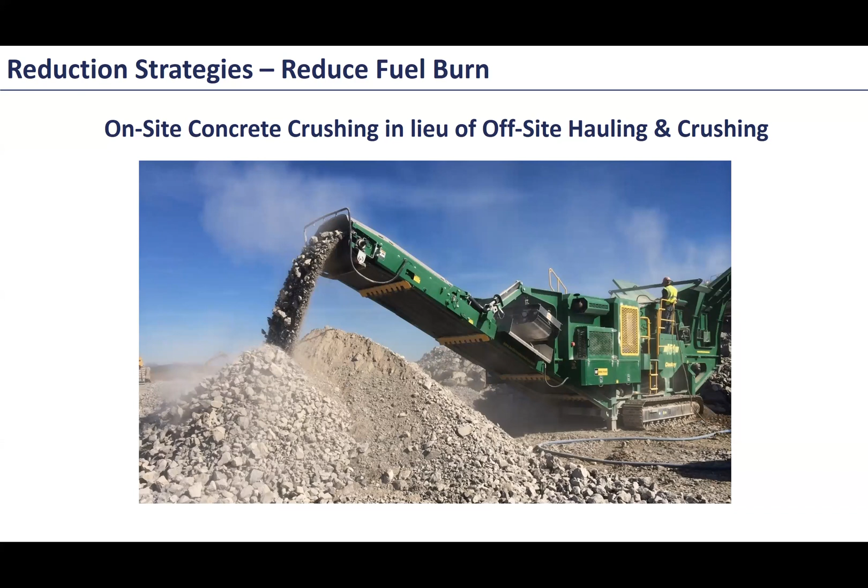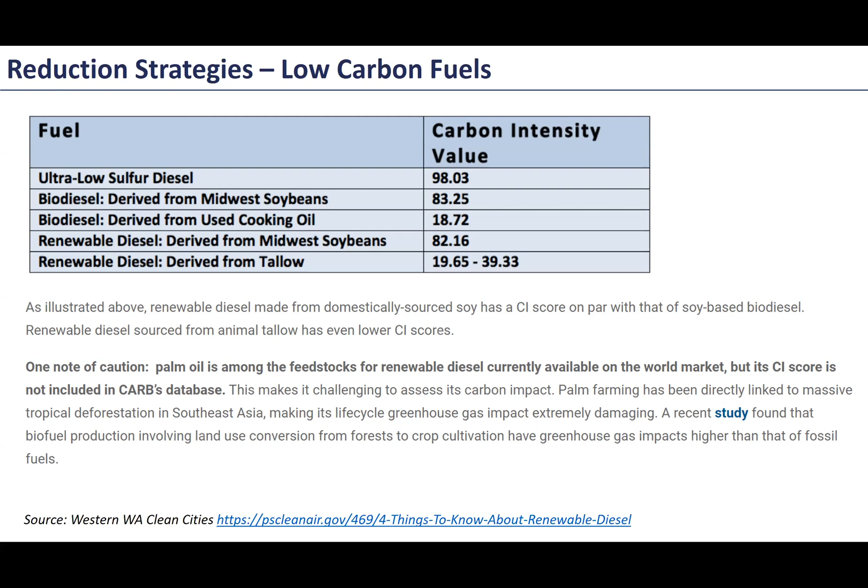There's also a lot of alternative fuels out there. Some of you may be familiar with biodiesel and renewable diesel. In California, renewable diesel might be more familiar, and it's supposed to be drop-in ready with any diesel-powered engine. So we can look back at that emissions factor of diesel, 22.51 pounds of CO2 per gallon burned, and find fuels with a lower emissions factor. Here's a snapshot of some information I've found. Like a lot of things, sourcing is very important to consider. If renewable diesel is sourced from waste cooking oil or tallow, that's great. If it's coming from palm oil or soybean oil contributing to mass deforestation in Southeast Asia, maybe stay away from that option. But it's another thing we're researching to try and drive reductions in our emissions.

Finally, Stacy talked about this at the beginning, some research Skanska over in Sweden is doing with Volvo on electrifying construction equipment. I haven't seen a whole lot of this make its way over to the US, but it's a glimpse of what's on the horizon, hopefully the direction the industry is going in.

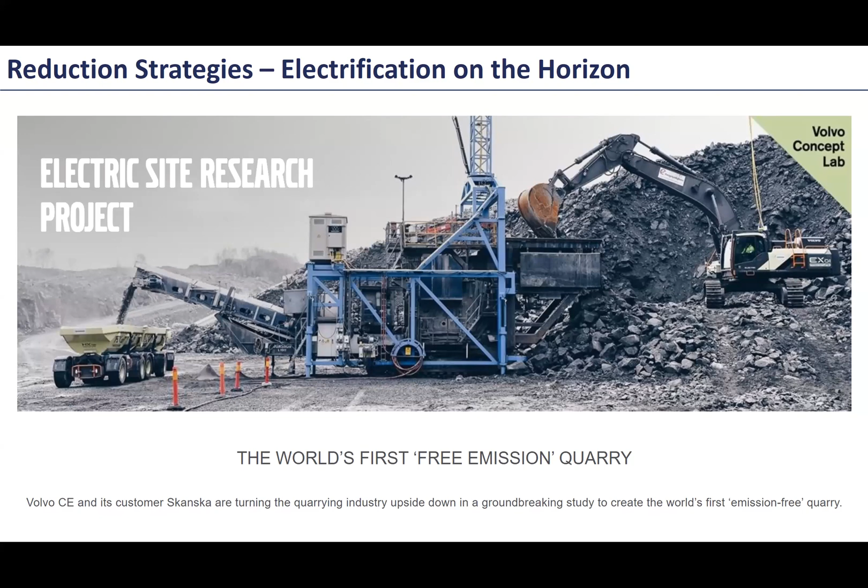That was it. If you have any questions, feel free to reach out via email, but this has been a real work in progress, and it's just us taking our best stab at it. So if anyone has comments or ways they think this process could be improved, we'd be all ears.